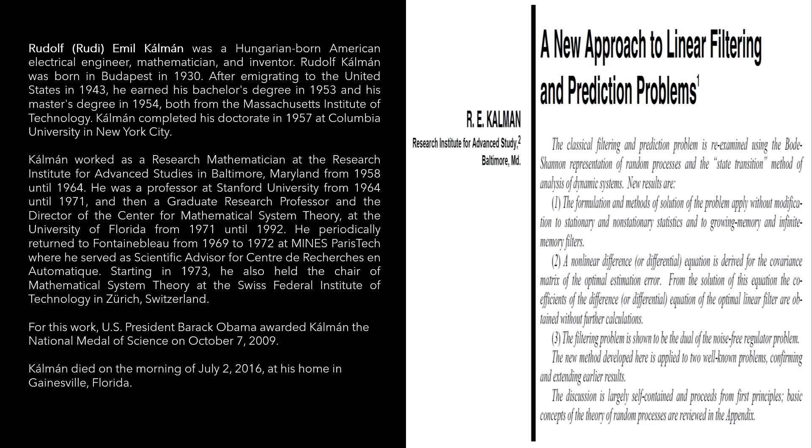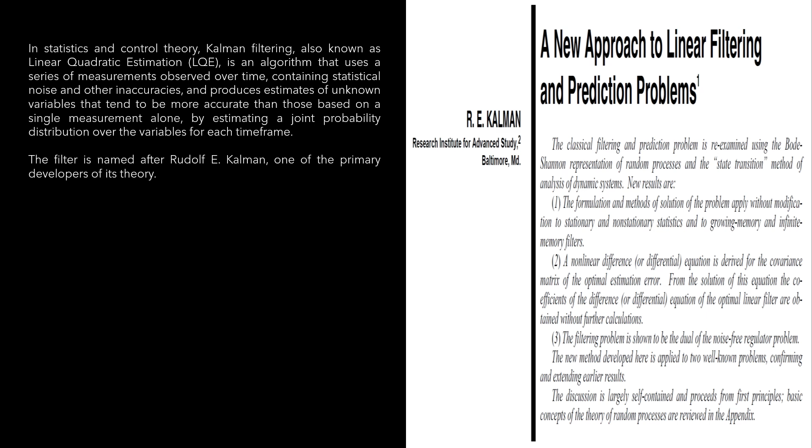In statistics and control theory, Kalman filtering, also known as linear quadratic estimation, is an algorithm that uses a series of measurements observed over time, containing statistical noise and other inaccuracies, and produces estimates of unknown variables that tend to be more accurate than those based on a single measurement alone, by estimating a joint probability distribution over the variables for each time frame. The transportation system has two fundamental components: the pipeline system and the pumping stations.

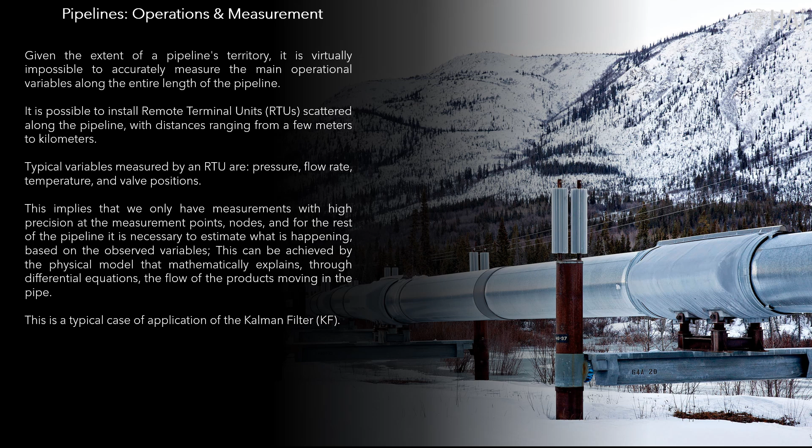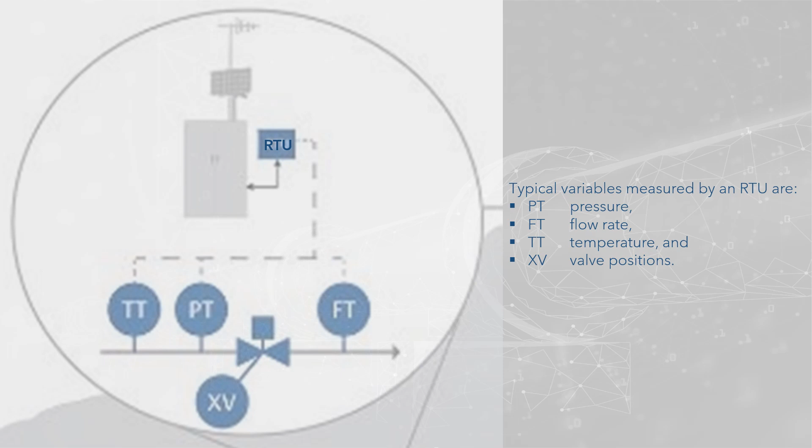Estimation of the operation profile. Given the extent of a pipeline's territory, it is virtually impossible to accurately measure the main operational variables along the entire length of the pipeline. It is possible to install remote terminal units, RTUs, scattered along the pipeline, with distances ranging from a few meters to kilometers. Typical variables measured by an RTU are pressure, flow rate, temperature, and valve positions. This implies that we only have measurements with high precision at the measurement points, nodes, and for the rest of the pipeline it is necessary to estimate what is happening, based on the observed variables.

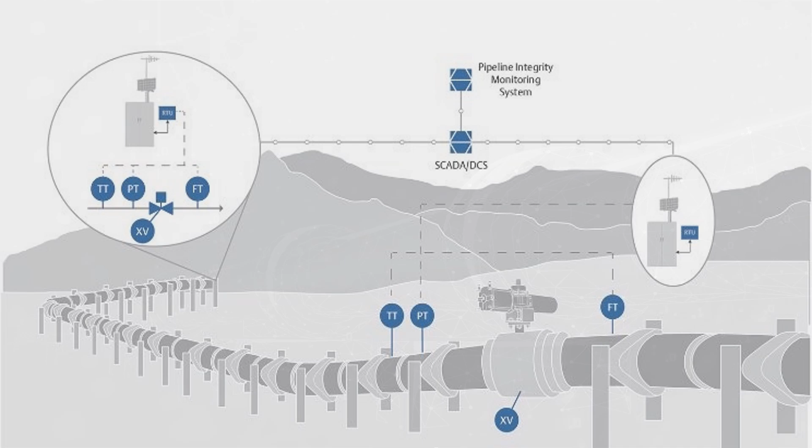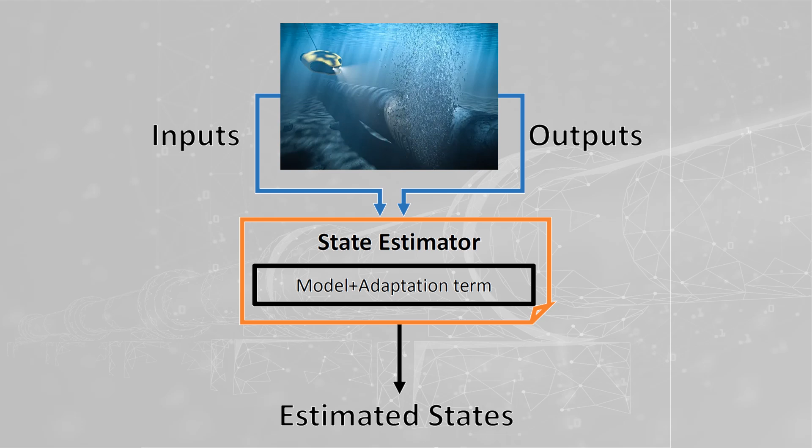This can be achieved by a physical model that mathematically explains, through differential equations, the flow of products moving in the pipe. This is a typical case of application of the Kalman filter, KF. Given the nonlinear nature of the flow process in the pipeline, one of the most commonly used methodologies is the extended Kalman filter. System communication architecture generally implies that all reaches report to the signal concentration hub, and from there go to the control center of the SCADA system.

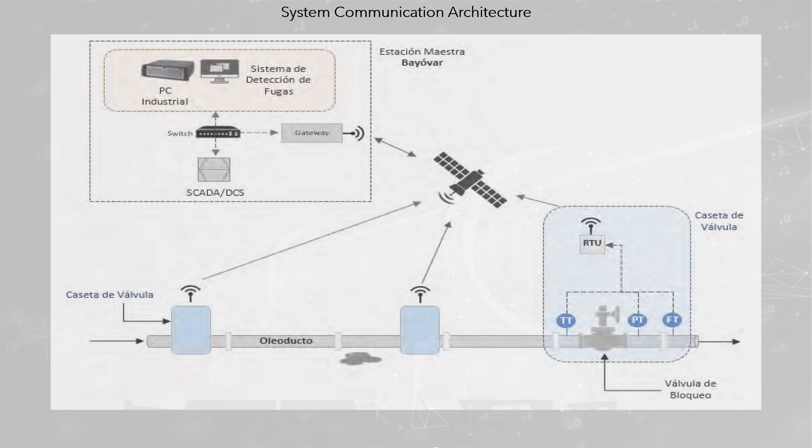The communication center can be a satellite or a monitoring system at the operator's offices.

Mathematical modeling can be organized as follows: a real pipeline that has all the real sections, including the measuring stations installed, and a virtual pipeline that has all the sections, including the installed metering stations and the virtual stations, where the operator wants to have measurements. Using the Kalman filter, or one of its extensions or variations, the value of state variables in virtual stations can be estimated. In this way, the profile of the operation is formed throughout the entire pipeline.

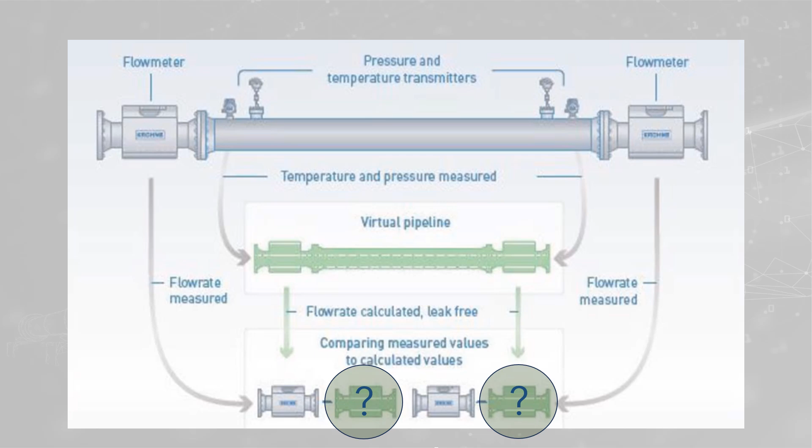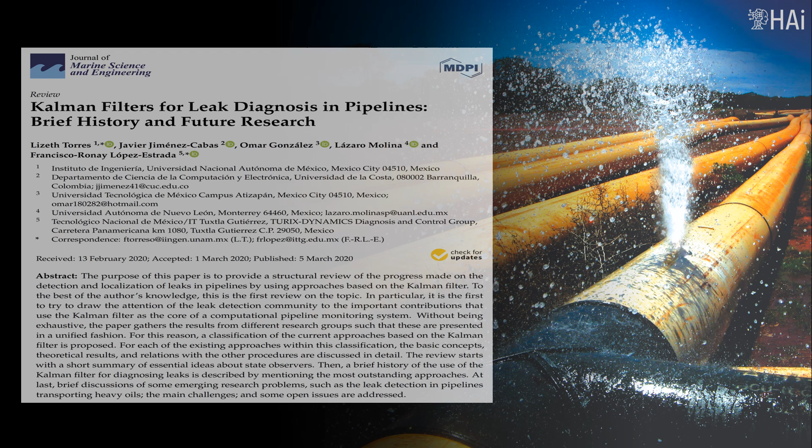State equation formulation. Brief history and future research on pipeline leaks. This section is based on the article 'Kalman Filters for Leak Diagnosis in Pipelines: Brief History and Future Research.'

Due to operating conditions, onshore and offshore pipelines are subject to environmental loads - wind, waves, currents, seafloor movements, and earthquakes - which can lead to undesirable vibrations, stress, fatigue issues, and the propagation of cracks. This latter problem is a major source of leaks along with aging pipes, installation failures, illegal extractions, and terrorist sabotage. For this reason, in order to avoid environmental disasters, the oil and gas sectors invest generous resources for the development of robust and reliable leak detection systems.

The detection and localization of leaks in pipelines may use approaches based on the Kalman filter, considering there are important contributions that use the Kalman filter as the core of a computational pipeline monitoring system. In leak detection systems, the methodology involves extending the estimation model of the operation profile to incorporate variables that help detect leaks. The state variables related to losses are the magnitude of the leak and its location.

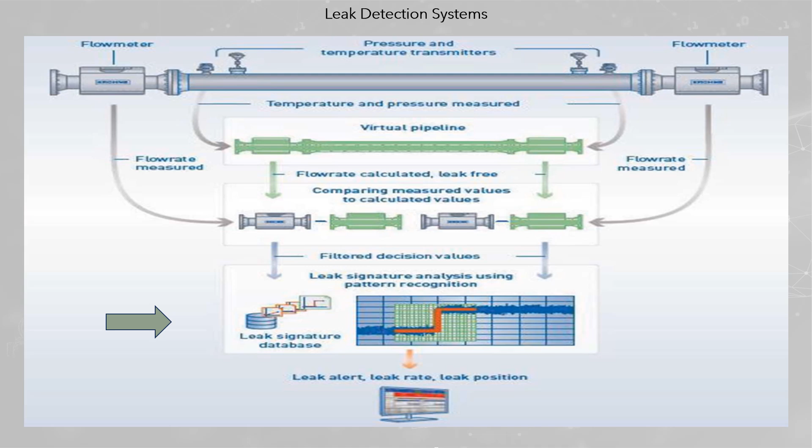According to the authors of the article, without being exhaustive, the paper gathers results from different research groups such that these are presented in a unified fashion. For this reason, a classification of the current approaches based on the Kalman filter is proposed. Then a brief history of the use of the Kalman filter for diagnosing leaks is described, mentioning the most outstanding approaches. Below is a table, divided into 3 images, with the works consulted by the authors.

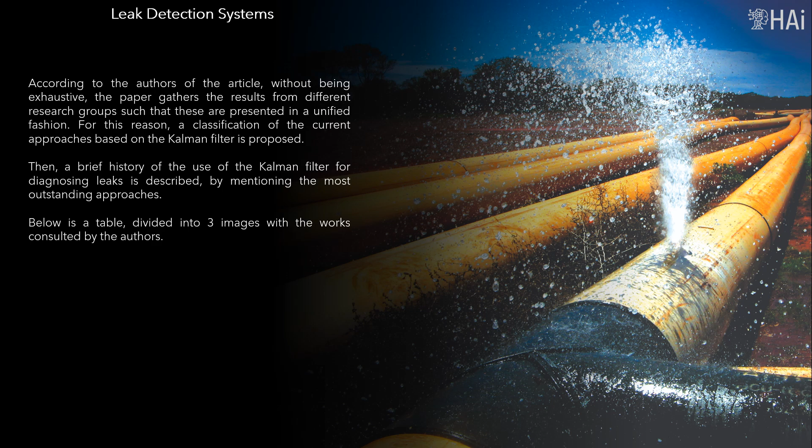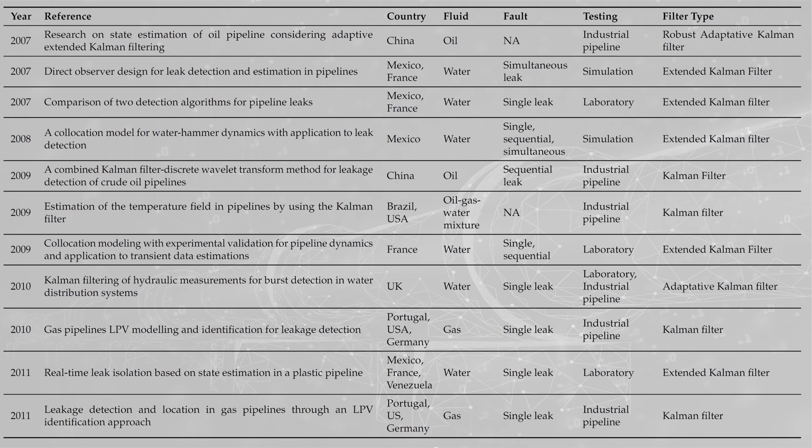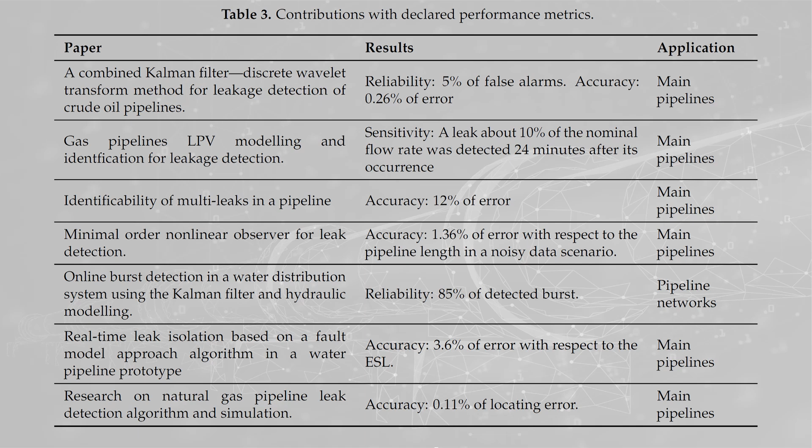Papers with declared performance metrics. The table presents the papers that declare the accuracy indicators of the studies carried out.

Leak detection. State equation formulation. Leak detection in pipelines, case of the North Peruvian oil pipeline.

This section is based on the thesis.

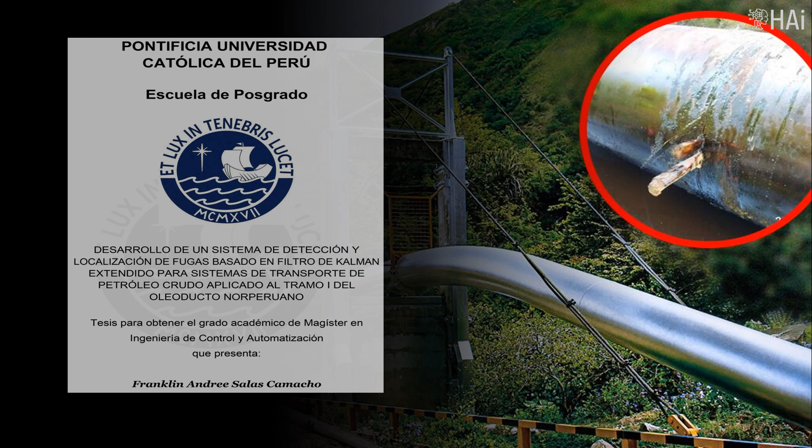The state-owned company Petróleos del Perú, Petroperú, is one of the companies transporting crude oil in Peru, and for this it has the North Peruvian Oil Pipeline, ONP, operating since 1977.

ONP crosses the jungle, mountains, and coast, and is divided into 3 sections: Section 1, Section 2, and the North Branch Pipeline. ONP has a length of 1,106 kilometers from the northern jungle to the Bayóvar terminal on the coast.

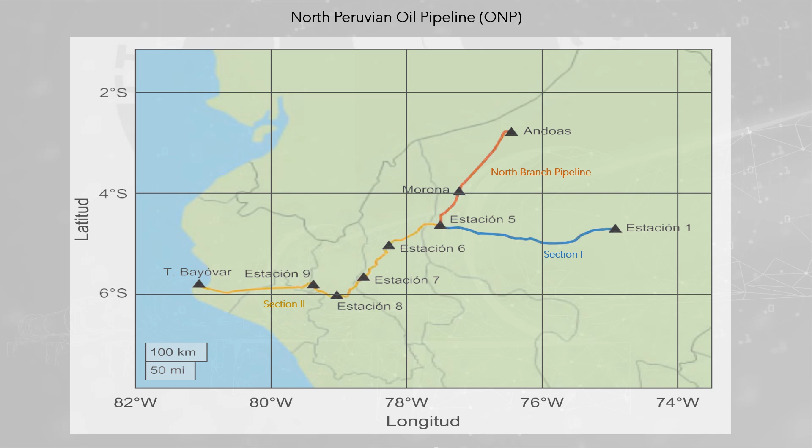ONP has a transport capacity of 200,000 barrels per day, and plans to increase this capacity to 500,000 barrels per day. Data from Petroperú, 2021.

The image shows the displacement of possible batches in Section 1, and the ONP elevation profile. There is a frequent phenomenon in the transport of liquid fluids through pipes, known as slack flow.

This occurs in sections where the gauge pressure reaches the vapor pressure of the fluid, also known as saturation pressure. Then a fraction of the fluid begins to vaporize, passing to a state of biphasic flow, liquid and vapor.

It represents a problem when the elevation profile changes from positive to negative slope, resulting in greater acceleration of the flow, and thus a discontinuity in the volume of flow transported.

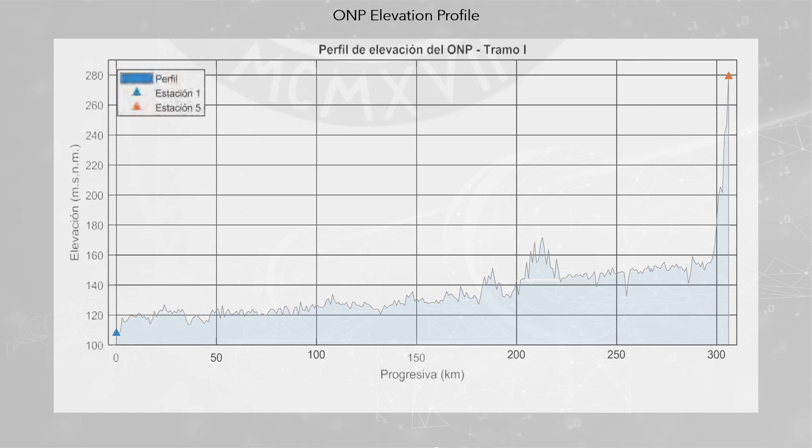The infrastructure of the ONP is designed to work in slack flow conditions in the vicinity of progressives 323, 458, and 671, belonging to Section 2 of the pipeline.

This phenomenon presents itself as a challenge for leak detection, since biphasic flow causes a decrease in the effectiveness of detection systems based on pressure gradients.

Therefore, it is necessary to have additional instrumentation in the areas where this phenomenon occurs. Also, biphasic flow alters the behavior of transient pressure effects in the duct, mainly in the speed of wave propagation.

During the period from 2014 to 2019, 47 contingencies were recorded. Most of the contingencies arising from criminal acts were carried out in Section 1 and Section 2. The section most affected by geodynamic phenomena and corrosion was Section 2.

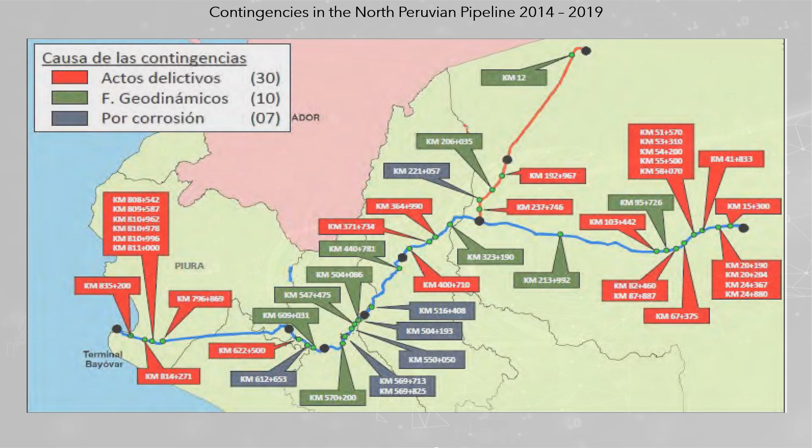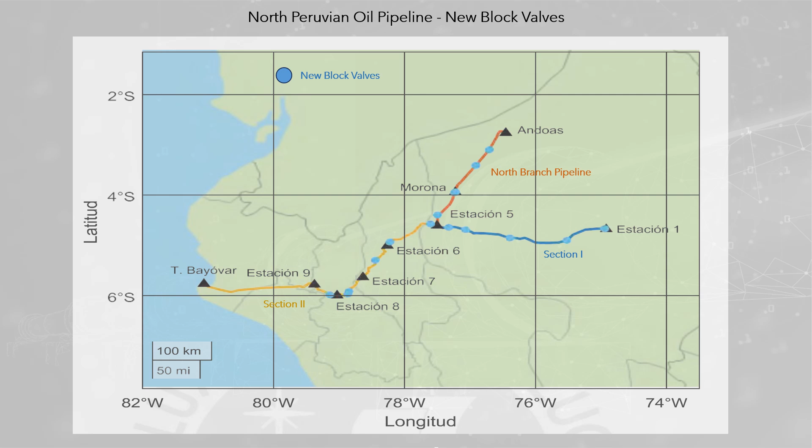Petroperú implemented a series of measures and technological tools to prevent and predict conditions that produce leaks, as well as the use of a pipeline integrity system incorporated into the SCADA system. In the case of the ONP, 19 blocking valves and the installation of pressure transmitters are being implemented.

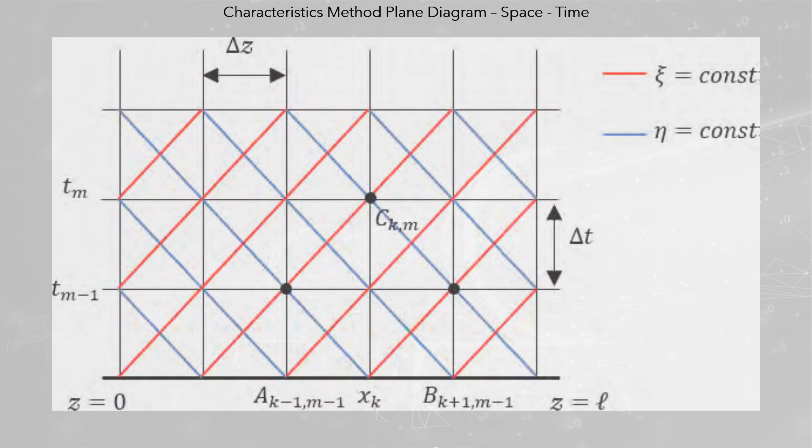To verify the operation of the extended Kalman filter, two methodologies were tested: the method of characteristics and the discretized method. For both models, the measurement noise was not considered, implying that a perfect measurement system was assumed.

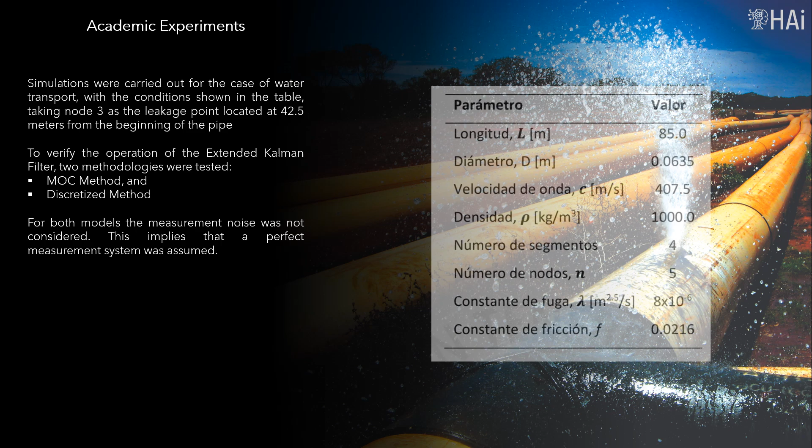The figure shows the response with the method of characteristics, for nodes 2 and 4, located at 21.25 meters and 63.75 meters respectively from the beginning of the pipeline.

In the height graph, the transient behavior over a time of 260 seconds is observed as a result of the leak at node 3. The magnitude of the leak does not produce a considerable change in the steady-state values.

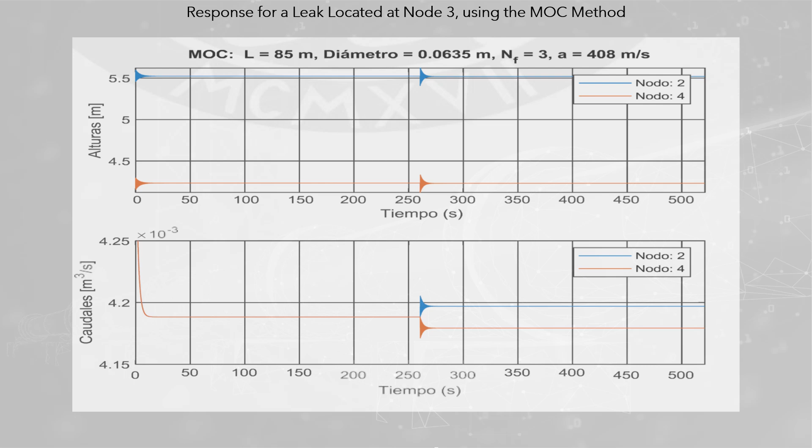On the other hand, in the graph of the flows, it is shown that after the leakage time, node 2 has an increase and node 4 decreases, which occurs due to the dynamics of the matter balance, and by taking the boundary conditions at heights h1 and h5.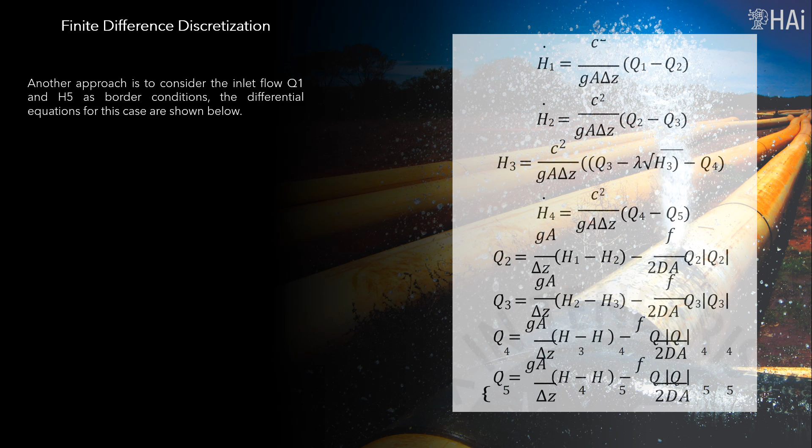The set of differential equations, Verde 2004, representing this dynamic is shown below. Another approach is to consider the inlet flow Q1 and H5 as boundary conditions. The differential equations for this case are shown below.

The main difference in this approach is that the flow rate prior to the leak node remains constant after the transient stage, whereas if the pressure heights at the inlet and outlet are taken as boundary conditions, the flow rate prior to the leak node increases.

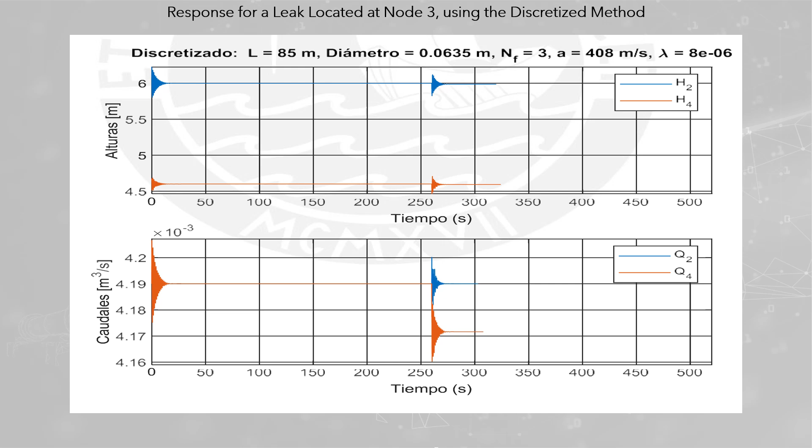According to Begovich et al., the second approach presents a better approximation of what happens in the real world. Both solutions present similar results for the same magnitude, location, and time of the leak.

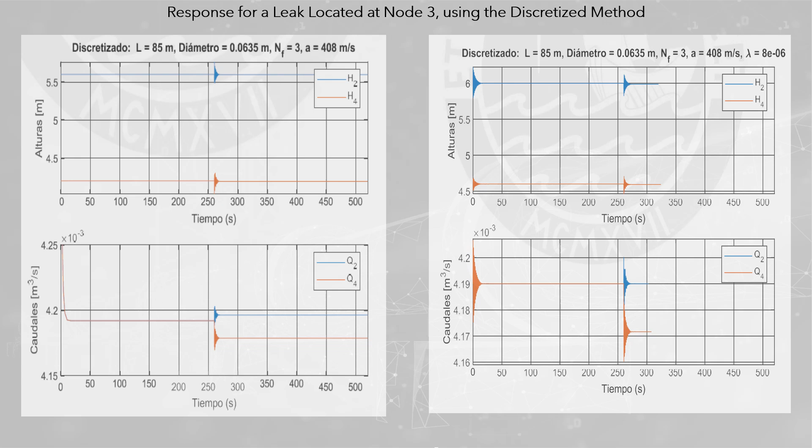Either of these two models can be used to represent the dynamics of the flow in the pipeline, and to simulate possible leaks located at any other point within its environment.

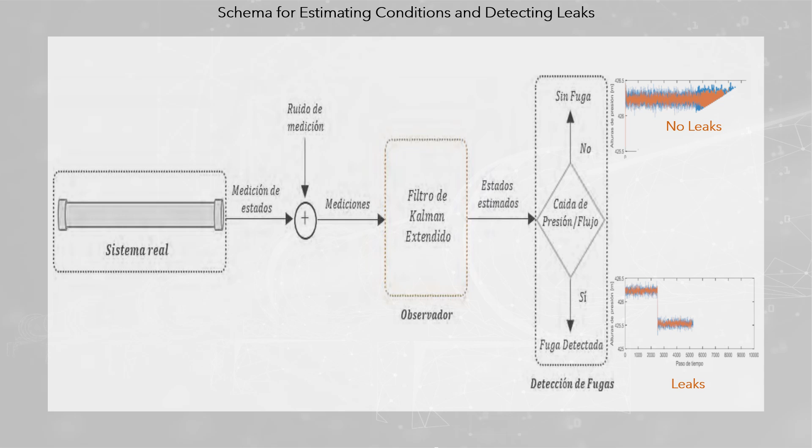Simulations were carried out for the case of water transport with the conditions shown in the next table, taking node 3 as the leakage point, located at 42.5 meters from the beginning of the pipe. For both models, measurement noise was not considered, implying that a perfect measurement system was assumed.

ONP Section I simulation. The characteristics of crude oil transport through Section I of the ONP are modeled as a tank-pipe-valve-tank system. The model consists of a 306 km, 24-inch diameter pipeline, with an initial tank with a 440-meter pressure head, and a 198-meter high tank downstream. The volumetric flow of crude oil is produced by a pump which supplies a constant pressure. There is a pressure height difference of 242.17 meters between the tanks.

The model is simplified in such a way that it does not include accessories such as elbows, joints, block valves, bends, etc. It is also assumed that the pipe is not affected by the slope profile, since it has an average inclination of 0.0315 degrees. This means it can be assumed as a straight pipe, making the momentum and mass balance equations one-dimensional.

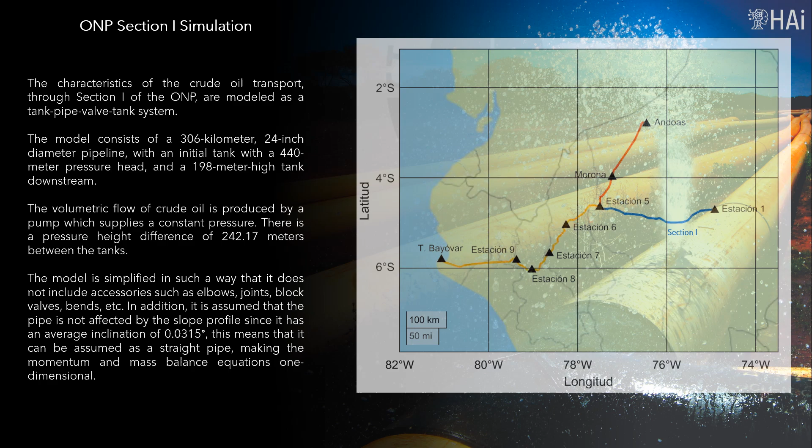The extended Kalman filter detects with a high level of accuracy the leaks located between nodes 7 to 13, with an average error of 0.47%, while if the leak occurs outside these two nodes, the percentage error begins to increase. This is because the dummy leak technique uses an interpolation function between these two nodes to locate the leak.

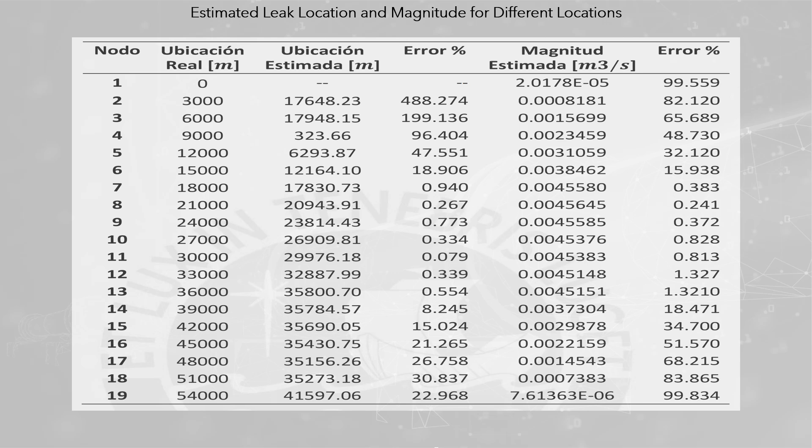This means that, in order to determine the position in nodes outside the range, the leaks must be greater than the actual leakage to produce a good estimate. This also occurs in other scenarios when the magnitude of leakage is 1%, 2%, and 10%.

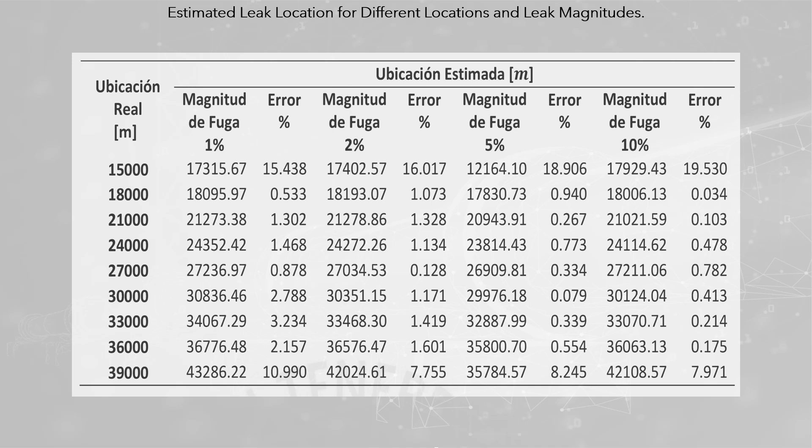Estimated leak location for different locations and leak magnitudes. By varying the magnitude of the leak by 1, 2, 5 and 10% for different locations, the change in error percent can be seen in the table.

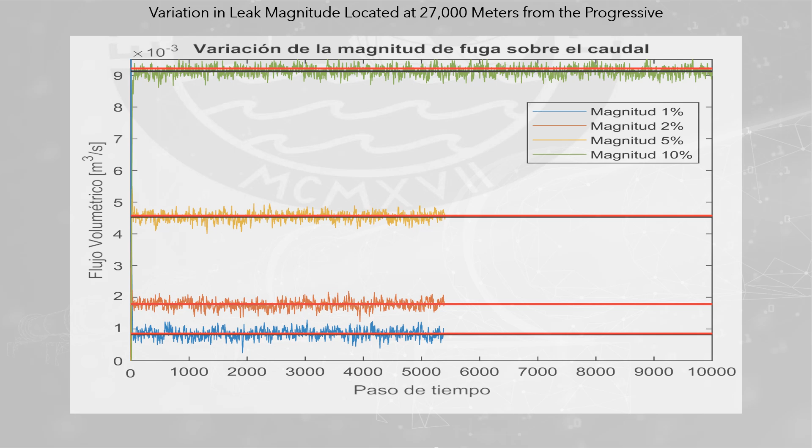The figure shows the estimate of the leakage flow with the extended Kalman filter for different levels of leak magnitude, where all estimates tend to be around the actual value of leak magnitude, for a location 27,000 meters from the pipeline progressive.

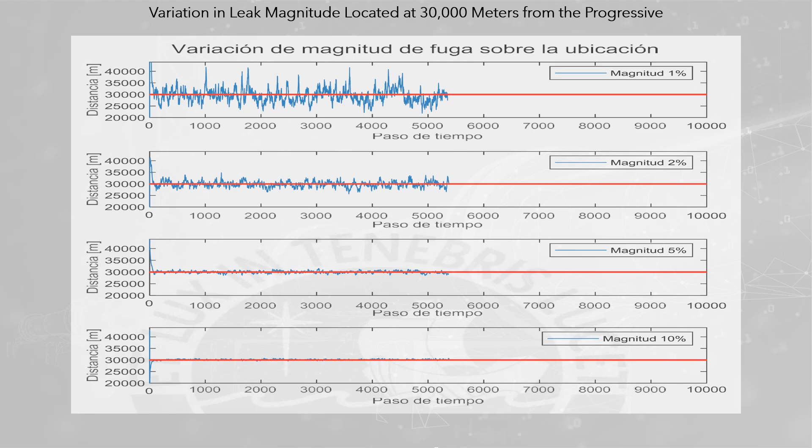Kalman filter applications in oil and gas pumping stations. Kalman filter applications: PHM maintenance in pipelines, prognostic and health management.

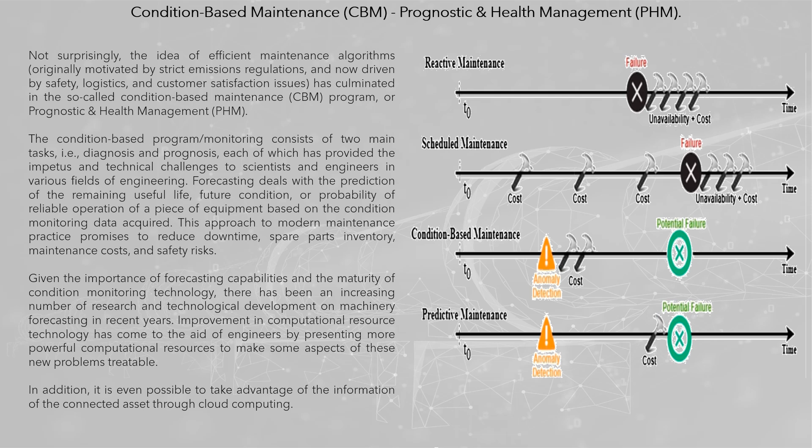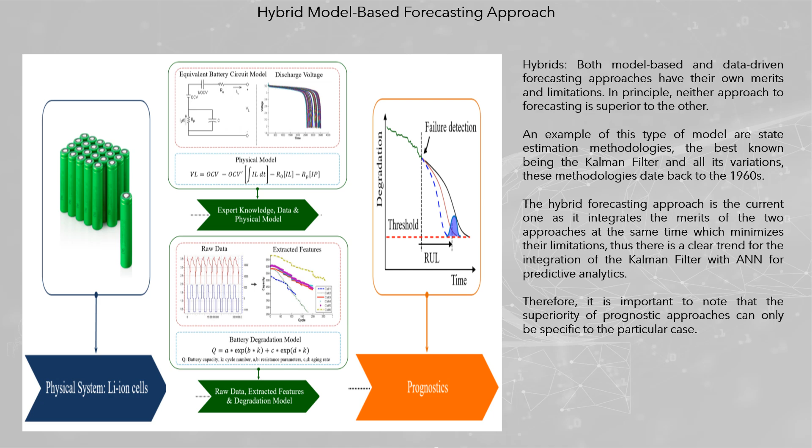Like Herbert Simon, Hypothalamus Artificial Intelligence believes that computer-based mathematical modeling is the greatest invention of all time. Thank you for your attention.